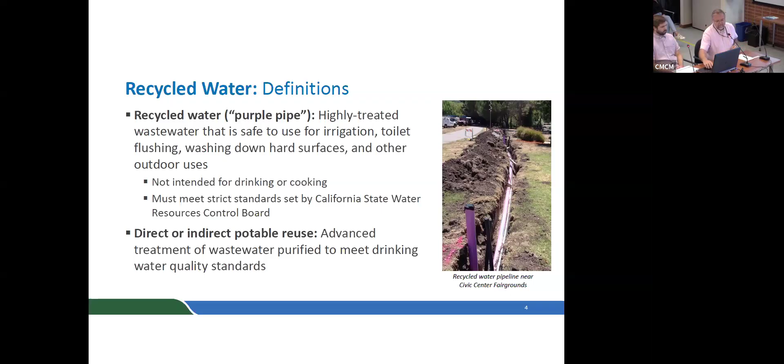So then looking at an example of recycled water, Purple Pipe, we're going to distinguish irrigation and toilet flushing from direct potable and indirect potable by calling it Purple Pipe. The classic project in our service area is a pipeline to Peacock Gap Golf Course.

So we had interest from NGOs and others to raise the roadway so that the bay would have a free flow of tidal water there. So tremendous cost in going down that coastal route. Neither of those two options appeared to work for us.

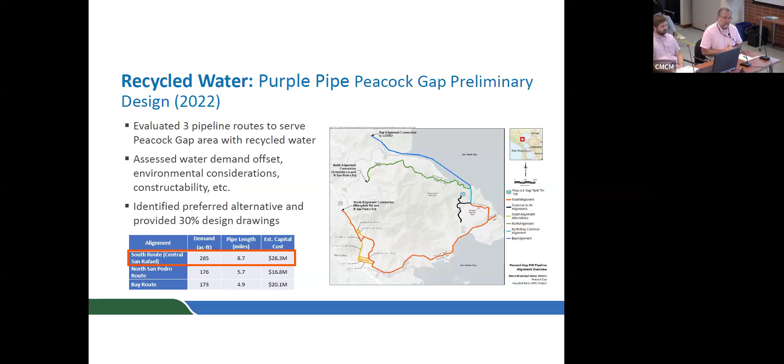Which, of course, it has been for a long time. I think it would be wise to distribute that map, the one that shows the 9 areas for reclaimed water, the master plan from 2000 that has the 21 different routes or phases.

The question I asked the first day I was on the board was, is there one of those done? Today, there's still only one of those done out of 9. So there are political problems. I'm surprised San Rafael hasn't kicked about this one, or have they not heard about it yet? Haven't heard about it yet.

Yeah, so these are just planning level estimates, and you can imagine there would be challenges in downtown San Rafael if we were putting in that amount of pipe. But it would be something that we'd have to work through.

So after purple pipe, we were talking about another form of recycled water, the indirect potable reuse. This is the advanced treated water that typically doesn't go into direct drinking water use. It goes into some form of environmental barrier, and that could be a reservoir, where there'll be a detention time.

I think a minimum of 6 months would be required, or groundwater. Of course, we're quite familiar with groundwater examples down in LA, where they're pumping highly treated recycled water into the groundwater to form a barrier against salinity intrusion into the drinking water supply down there. San Diego is working on one right now for 30 days.

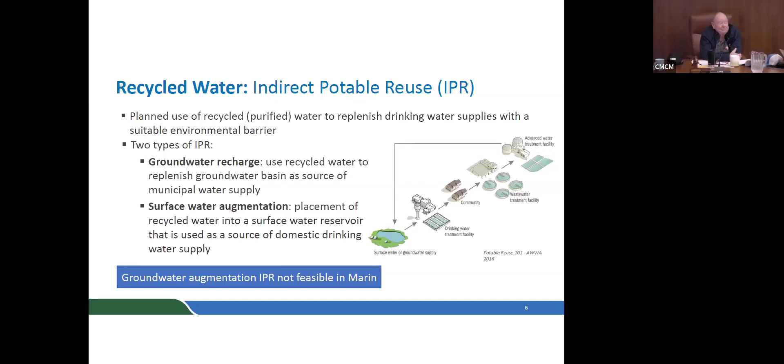So this is an example of what these are. In the strategic water supply assessment, we did look at a version of this in Marin, where we tried to centralize and collect all of the wastewater from the main treatment facilities to a central location, and then move that water up to Kent Lake, which is our biggest reservoir. It's going to have a sufficient amount of detention time for us.

You can see how the numbers pencil out there. It's just that there's a lot of piping associated with this option, and we know piping is anywhere from 3 million to 5 million a mile. Then the volume of water you can see there, about 7 MGD, or 7.8 thousand acre feet per year.

Plus pumping—huge pumps, yeah. We're down in the flats and they're up in the hills. I can't remember the number, maybe 4,000 horsepower worth of pumping to get that thing up the hill to Kent.

Sorry, Paul, you're not referencing here the cost per dry year in acre feet? I mean, that expense, so it includes all the infrastructure, the pumping.

But the other big challenge is that these treatment plants require continual operation. You cannot turn them on when you need them and turn them off when you don't. So presumably that cost of running them, even when we're not using the water, is included in the dry year cost. It is - I think we should have deleted that asterisk statement from the slide set. The 16,000 includes the total cost. And if you recall, in comparison to the atmospheric river capture project, that's around 5,800 dry year cost, so we're on the order of 3 times that.

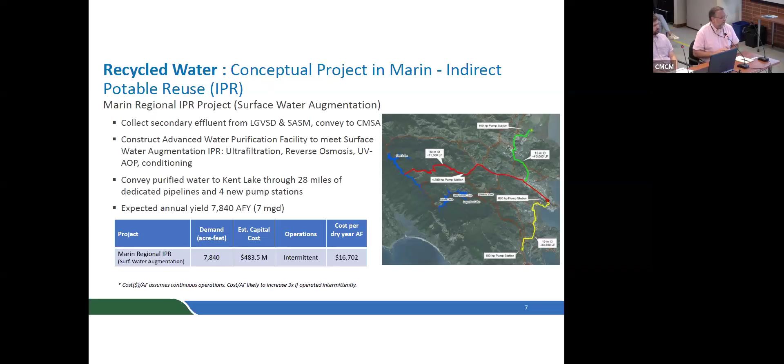I've heard Ben say, until we have peaker plants for water - in the same way our electricity providers use peaker plants to meet high demand periods - for advanced treatment, these are going to be difficult projects to implement in areas with intermittent shortages. They make a lot of sense in areas with chronic shortage though, right? Yes, there's a big difference there.

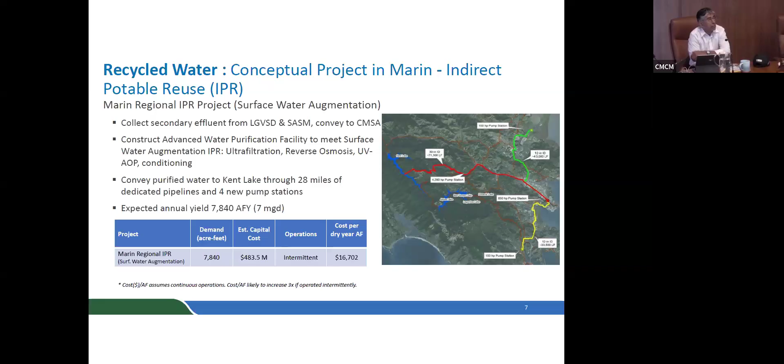And some bright spark said, well, why don't we stick this in the groundwater basin and maybe it'll stop the saltwater intrusion. They've been doing that for many years, just to collect information to confidently tell the public and get them used to the concept of putting that water in the ground. They've been doing it ever since 1976. With a recent upgrade, it's now called the groundwater replenishment system, and they're looking at expanding up to 130 million gallons a day.

It's probably one of our longest standing large recycled water projects for groundwater replenishment. If you remember that one, they kind of skirted over the issue of where the water went. Yeah, they built this barrier between the saltwater and freshwater because of the ocean. Then they had a problem with NDMA, a disinfection byproduct that showed up in Mesa Consolidated wells, and people began to question what was happening. At that point, they disclosed that 90% of the water flows to the inland side, to the wells, and 10% goes to the ocean.

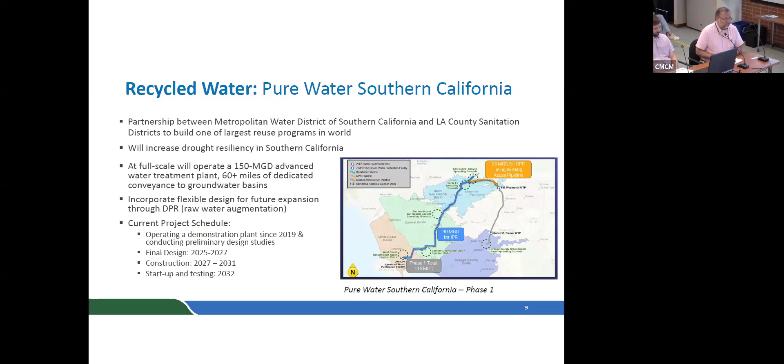In terms of direct potable reuse, there are a couple different flavors. One is raw water augmentation, treating water to potable standards and then putting it in a reservoir. You might ask how that differs from indirect potable reuse - this time you could put it into a reservoir that doesn't have the 6-month residence time Chair Russell mentioned, maybe a shorter one. In some cases, they're looking potentially at treated water augmentation, at least conceptually, which goes straight into the pipes from the treatment plant.

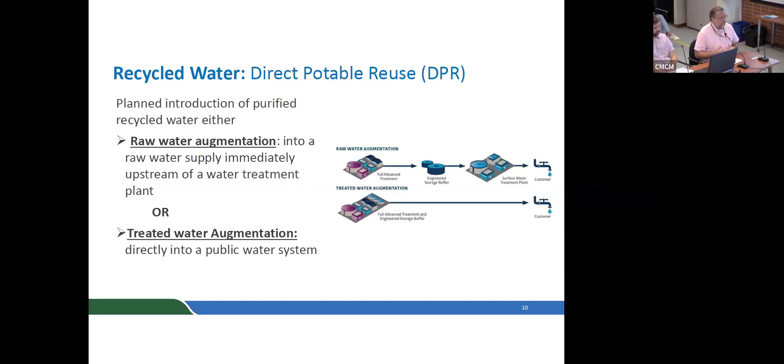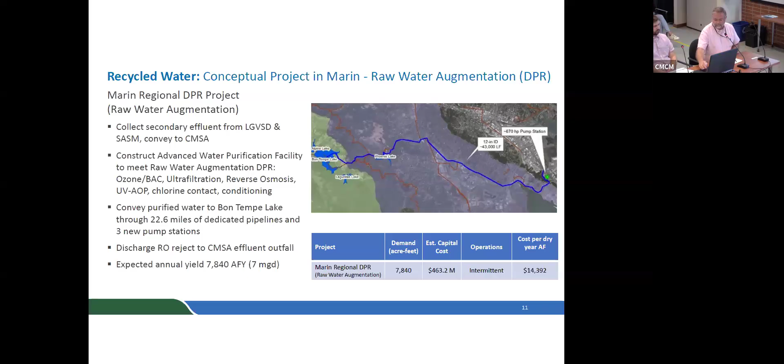For treated water augmentation, we did a study with CMSA to look at what that might look like. There were a couple of different size plants considered, a 2 MGD and a 4 MGD. We looked at what the treatment facilities would look like in order to meet the level of treatment that would pass muster with the regulations.

One of the problems with CMSA is saltwater infiltration, which drives their salt levels up - about double the level of Las Gallinas, maybe triple. That's the TDS, total dissolved solids, because they have so much infiltration in their header lines. Reverse osmosis would be included anyway, but what the salt does is reduce the yield, so you need more membranes to produce the same amount of water - more energy, more cost, more chemicals, and it increases the salinity of the reject.

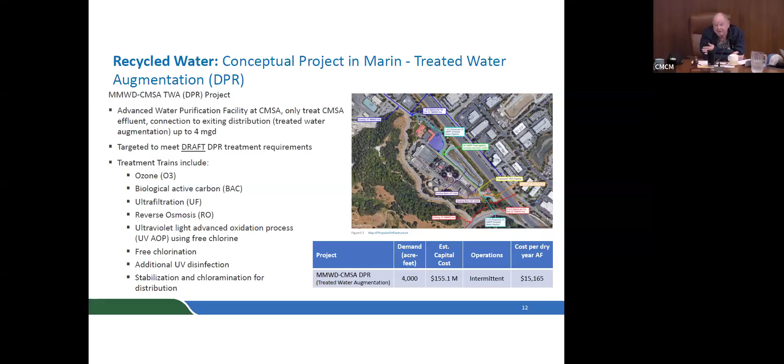That was really the problem our desal had, as I recall - getting rid of the water was the touchy part. Even though it's injecting back into the bay, which is already salty, it's really salty. There are a lot of challenges with desal for sure, including the board.

So that was a conceptual example of a way we might employ DPR, direct potable reuse, in California. What does that look like in California? Well, there aren't any. So let's cast a broader net - let's go nationwide, let's go worldwide and look at these options.

In Texas, there's an outfit that's been producing water, and it essentially goes to the inlet of their treatment plant. This was born out of a time when they ran out of source water for their treatment plant - at one point, their treatment plant was receiving almost exclusively DPR water as a source.

Maybe the most famous example, often quoted at different conferences, is Windhoek, Namibia, which has been in operation since the 60s. As was pointed out earlier by Director Cush, where needs must, these options make sense. In Namibia, there is no water to drink other than this source water, and they've been making the most out of that for quite some time.

And as we talked about earlier, the San Diego Pure Water Project is looking at both the IPR surface water augmentation and DPR raw water augmentation for their treatment plant.

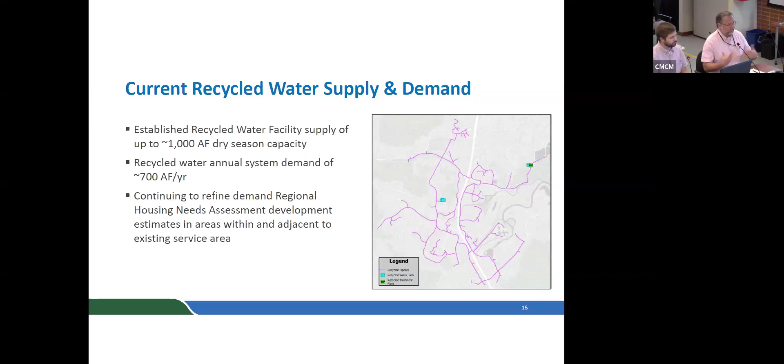And the peak is driven by irrigation, right? That's recycled water's predominant use is irrigation. So when we're looking at capacity issues, we want to make sure we can address any new irrigation—Peacock Gap Golf Course comes to mind. And of course, toilet flushing adds to all of that. A lot of what's being discussed here today will be around both irrigation and indoor uses as part of the regional housing needs assessment.

Just one last point, Matt—indoor use right now is restricted to multi-unit buildings and maybe some commercial buildings. Yes.

The 1,000-acre-foot dry season capacity—is that the plant's capacity, or is that what we're obligated to take, or what we have the right to take? Right, it's around how much we have the right to take.

Do you know off the top of your head what the actual capacity of the plant is? Yeah, we had this discussion with Las Gallinas, and they're pretty confident it's around 4 million gallons a day in terms of plant capacity. The district has purchased, I think, 2.25 million gallons per day of capacity, which is more than adequate for our uses at this point in time.

You also have to evaluate the source of how much wastewater there is. So the dry season wastewater is about 2 to 3 MGD. But of course, Las Gallinas has a lot of pond storage. So your daily production of wastewater plus your pond storage will give you a number you can reasonably rely on in terms of capacity for recycled water.

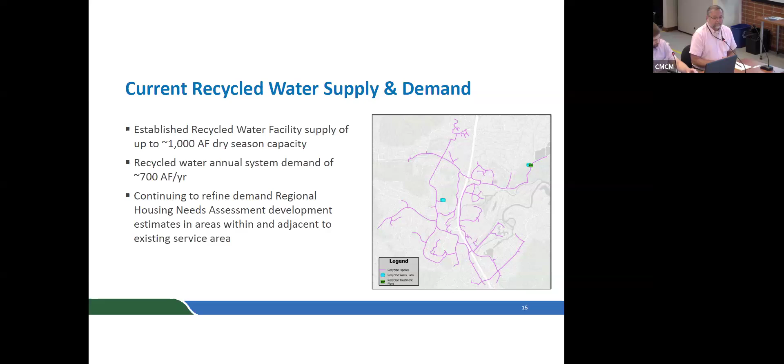So here's a deeper dive on the projected housing growth and demand for the recycled water system in the Terra Linda area. There's a lot of information on this slide, so I'll walk you through the table. The first column is site type, and there are 3 main types of sites: current customers, infill—housing growth adjacent to an existing recycled water main—and recycled water projects, which would require a pipeline extension.

A good example of infill would be Northgate Town Center—it doesn't require any capital investment from the district to connect to. And then Lucas Valley has some housing growth projected, but it's about a mile away from the existing system, so that's a good example of a pipeline extension project. The final row is just a sum of all the rows above it.

Moving on to column 2, those are new housing units, which by definition don't apply to current customers. We found 2,045 housing units proposed as infill in the existing Terra Linda area, and 888 for recycled water projects, for a total of 2,933 new housing units in the vicinity of the existing system.

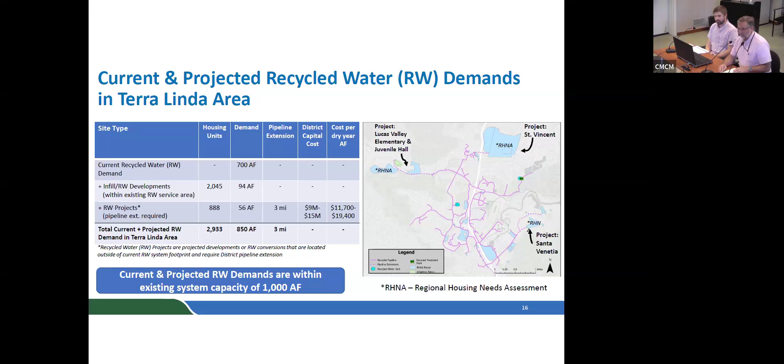Nick, a number I have in my head is about $1 million a mile for pipeline replacement. Is it 3? 3 to 5 is what we're finding, and that's consistent across all of our pipeline projects now. Or is this maybe higher because it's new pipeline? This is consistent with what engineering is finding, about 3 million a mile, which doesn't include the purchase cost of the pipe.

So we've tried to bundle in the purchase cost of materials and balance that with what we're seeing on other planning level projects like ARC, like the Nicasio pipeline from Soulajule to Nicasio, which was 2 or 3 miles and up in the $25 million range. I mean, that was crazy. Well, you look at ARC and it's not too far behind in terms of cost per mile. So we're trying to balance, these are estimates.

Okay, but the number, even for our pipeline maintenance regular replacement cycle, the number I should have in my head now is about $3 million per mile. That's correct.

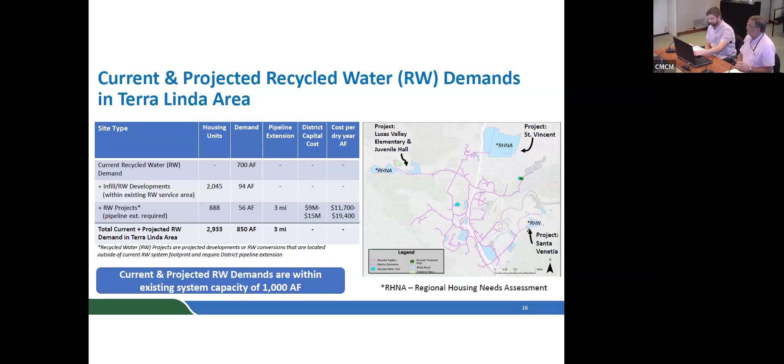To summarize, the demands shown here in the vicinity of the existing system are within the current capacity of the treatment plant. And keep in mind, just to put things in perspective, the new number from Sonoma Water is 1,750 an acre foot, against 19,000. That's just one of the problems with slowed down reclaimed water. It's partly regulations and partly the infrastructure, the building of the pipelines.

Did they buy you a bulletproof vest yet, Nick? Talking to San Rafael? Yeah, they haven't seen this yet.

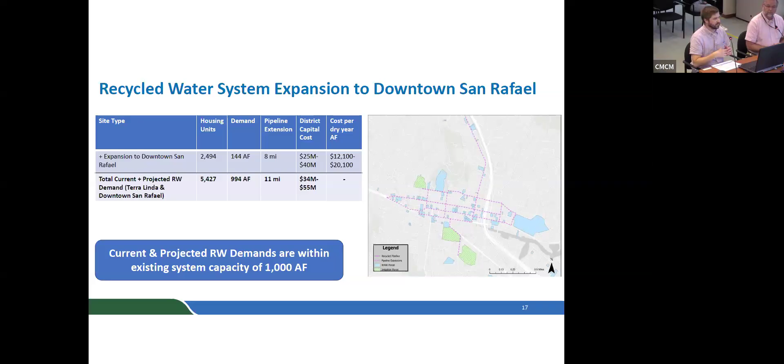So to summarize this as well, the current and projected recycled water demands would be within the existing 1,000 acre feet of dry season capacity.

So Nick, Paul, just on costs, I think I probably ask you this every time we see these numbers, but at some point the capital costs are paid off, right? Over what period is this cost per dry year acre foot calculated? I don't know, after 100 years it'll really drop substantially. Over 30 years, what's the period of payback that's included here?

So we've tried to analyze all of the water supplies on the same basis. And if you recall, with ARC being our project, pipeline lifespans are about 100 years, and that's what we've tried to do here as well. So this reflects the full cost of the project over the whole lifespan of the project.

Maybe this is somewhat missing in some components. We haven't included extra treatment costs for this water, but compared to these numbers, those almost don't show up. Another piece of this that kind of favors the costs shown here is that this assumes all of the housing units for RHNA would be built in year one, which isn't likely. It's more likely to be over 10, 15, 20 years that they're being constructed, so we're not even able to utilize that full demand until a few decades down the road.

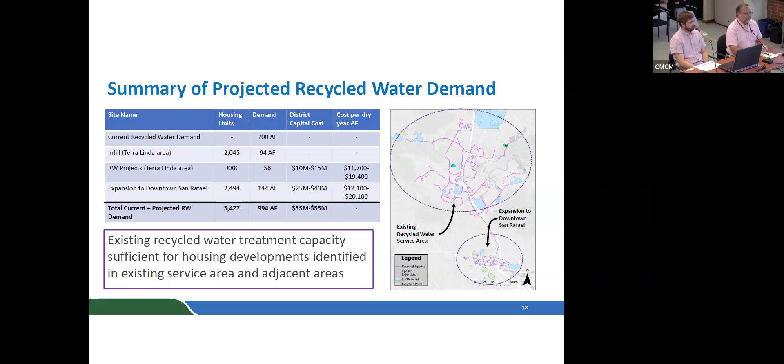We made a deal with them when they were remodeling the emergency facility, the old one up the hill by the roundabout. They were remodeling some of those offices and we were like, no, you guys need to put recycled water in it. It's really difficult here, how about not this time, we'll do the irrigation but we promise the next module. And they had Las Colinas, their big new facility, as a plan, so we were able to make sure that was included.

I think it's important to recall too that at our treatment plant, which preceded Las Gallinas' ability to recycle, we actually did shut our plant off in the winter because it was too expensive to run. We had a plant right at the golf course. So the tank, which we gave to Las Gallinas, we built a $7 million tank up on the hill there, right above, across the road from the golf course, on that hill by Smith Ranch.

But we had the problem of not enough demand to justify running it—it was even more expensive. So they would shut it off and substitute in fresh water and not tell the users. So the users think they're getting reclaimed all the time, but they weren't. But the quality of the reclaimed water is so good that the user couldn't tell the difference, whether they were getting Russian River water or recycled water.

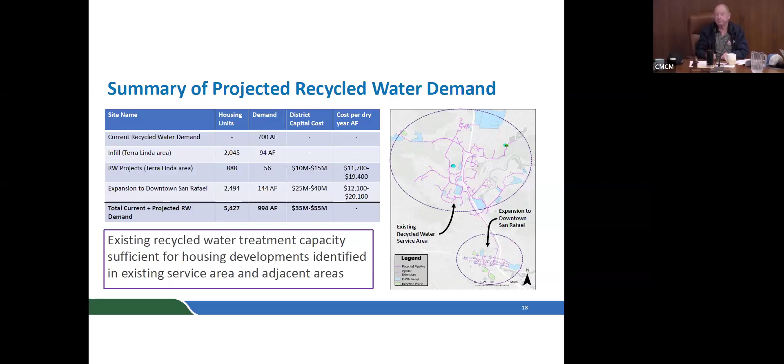And that tank is still a critical part of the whole system because it's the chlorine contact tank for Las Gallinas now, which the district kindly gave them, and then they tore our plant down.